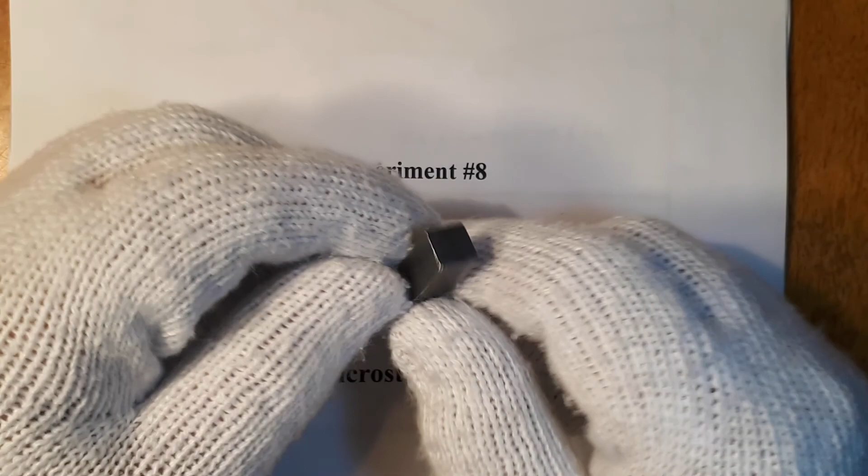Let's take a moment and talk a little bit more about Experiment 8, in particular, microstructures. In Experiment 8, we did Charpy samples, much like this one right here. The next step would have been to cut these, make a metallurgical mount, and look at the various microstructures after the different heat treatments that we did, like this.

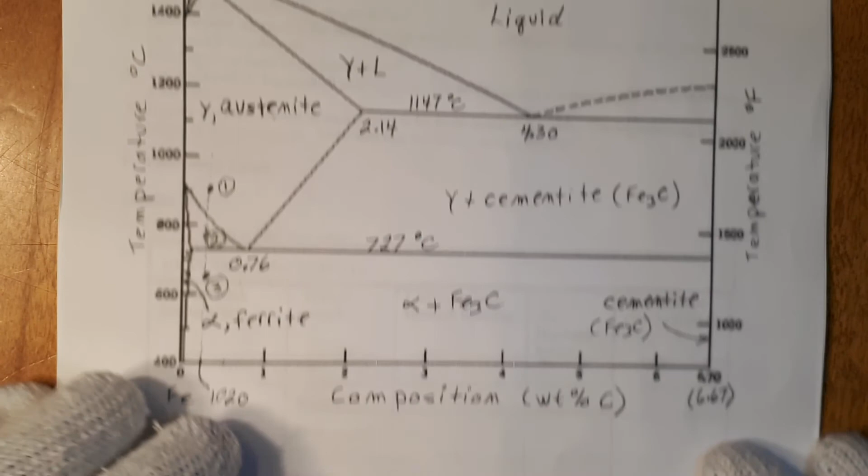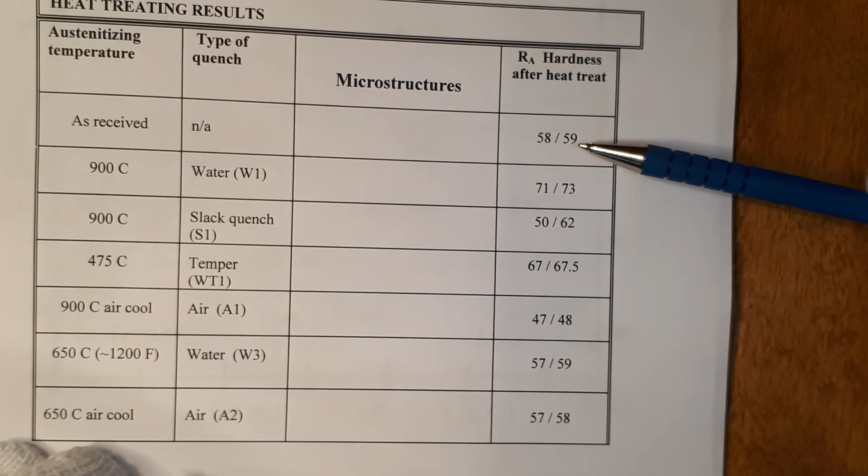This iron cementite diagram can be used as a guide for heat treating. I'm going to use this as our guide, and here is our experiment. I'll try and put these side by side. I rewrote the actual chart. On the right-hand side here, we have the various Rockwell A hardnesses based on the various heat treatments that we did.

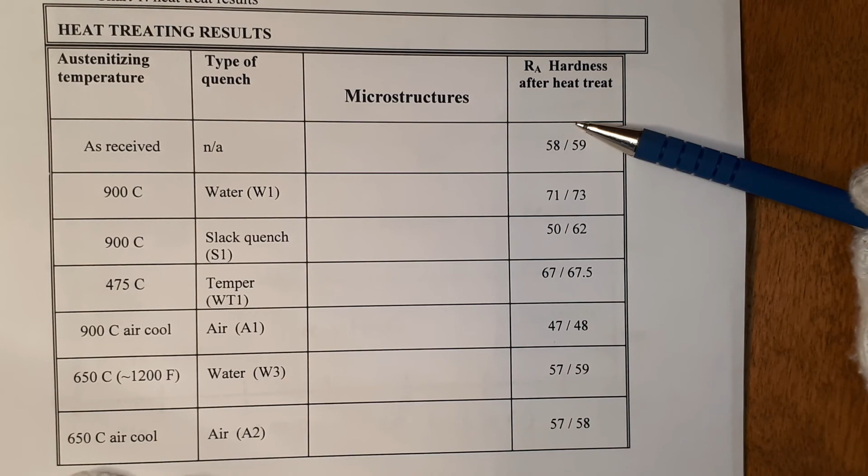What we see here are the results of both classes, the Tuesday and the Thursday class, going on down the list in Rockwell A. Now I'd like to talk about the microstructures, and I'll try and do this simultaneously with the iron cementite diagram.

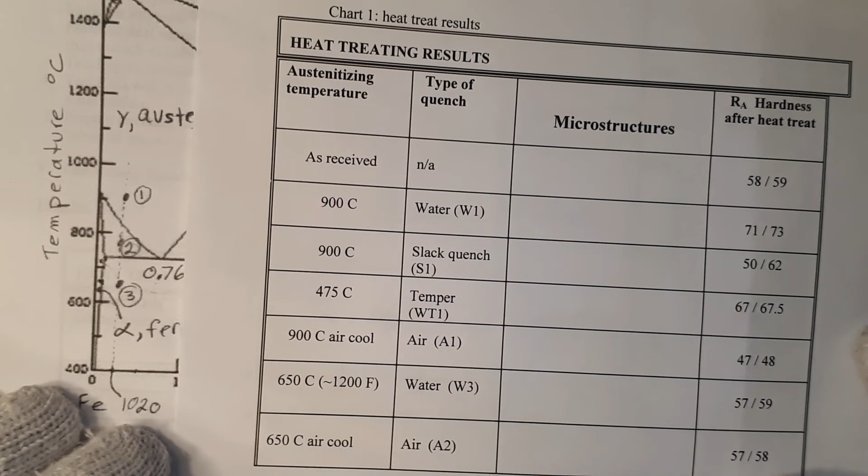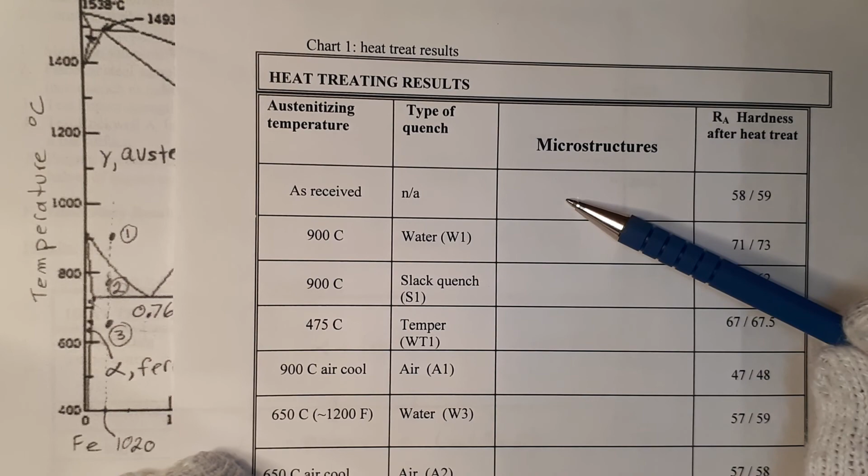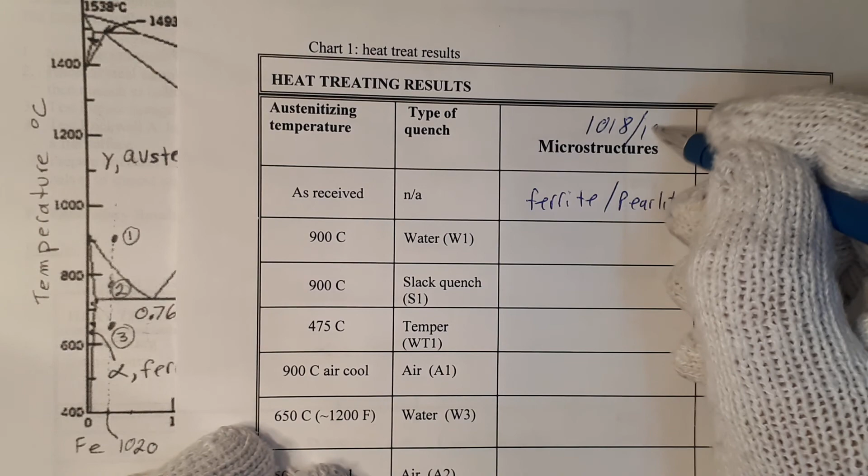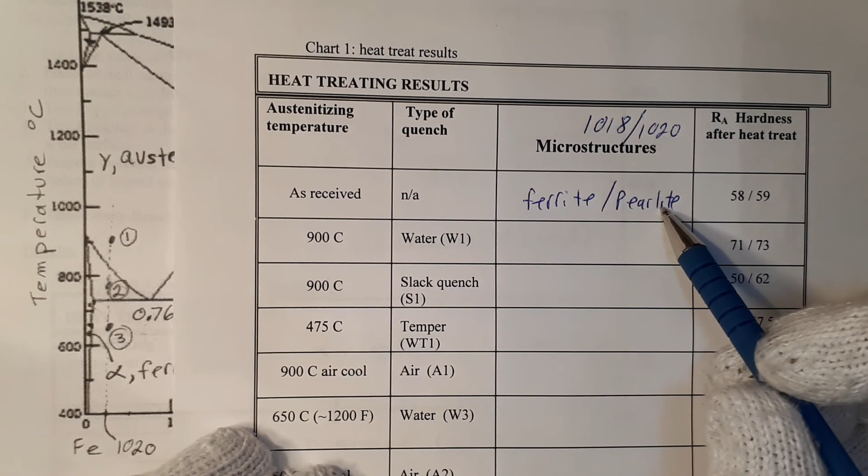In the as-received condition, this was cold-rolled steel, and the microstructure in cold-rolled steel, nothing special happened, would be slightly elongated ferrite and pearlite. Recall this was 1018 steel, or it could have been 1020 steel. The two steels were mixed in the drawer. I don't know which one it was exactly, but it's one of these two. Ferrite and pearlite, it wouldn't change much as far as the microstructures go.

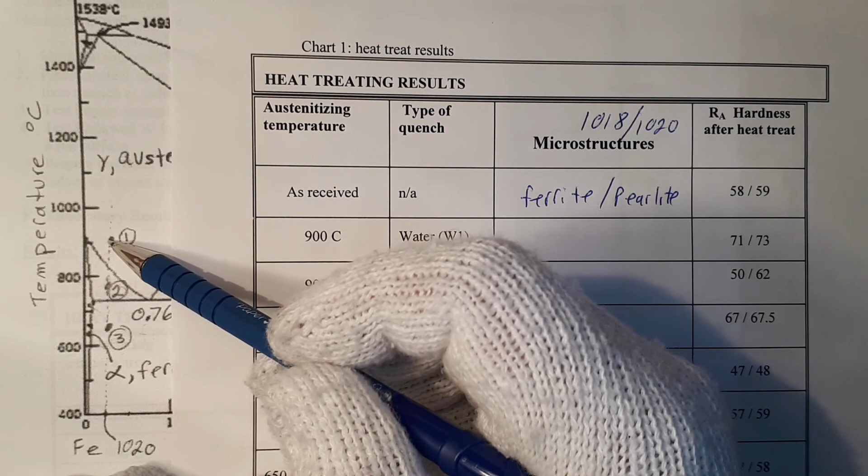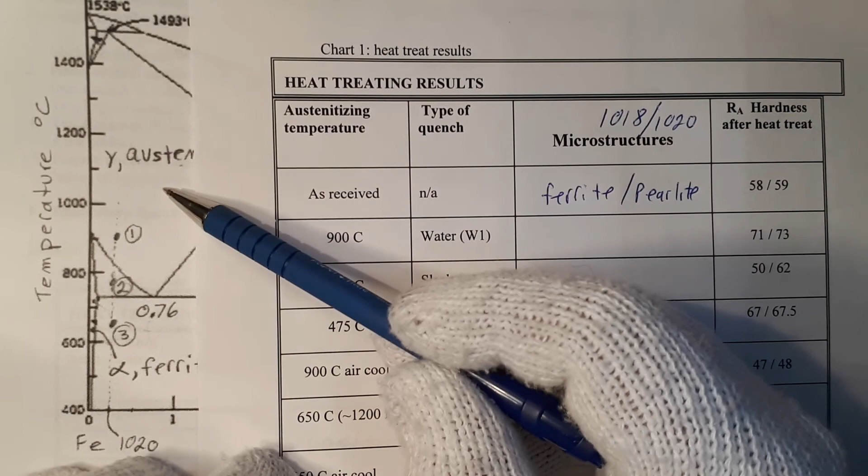The first sample that we did, we heated it up to 900 degrees Celsius. Here it is, so let's say 1020, it's easier to see on the graph. We heated it to 900 degrees Celsius. The idea here is to form 100% austenite. Once the austenite is fully formed throughout the sample, the rule of thumb is 1 hour of soaking time for every 1 inch of thickness.

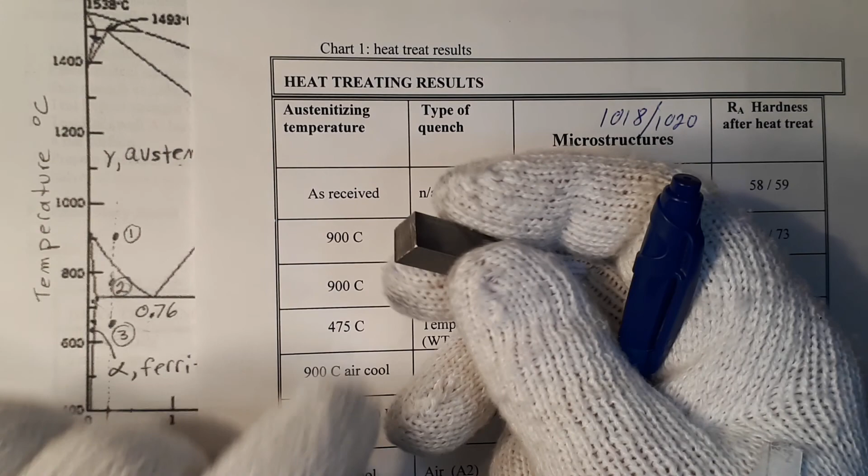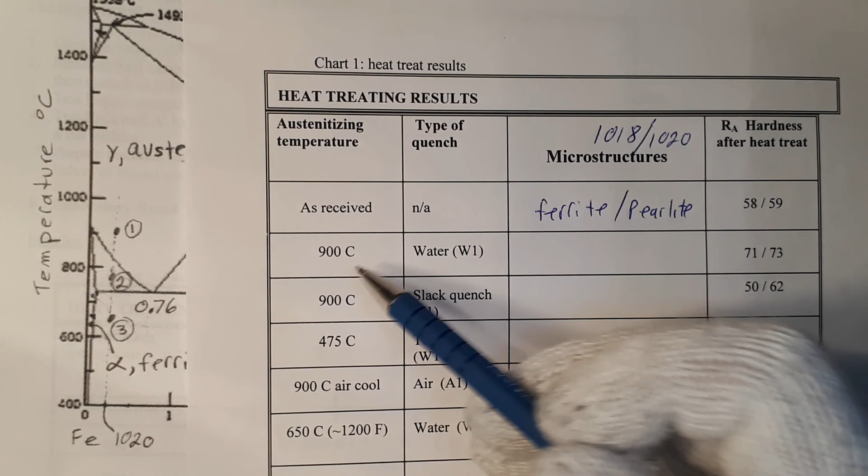So this soaked for 30 minutes, to ensure that the core all the way through is at austenite. And then we water quenched it. So heat to 900 degrees Celsius and then water quench. In doing so, the microstructure that would have formed after quenching, if you were to take that sample after quench...

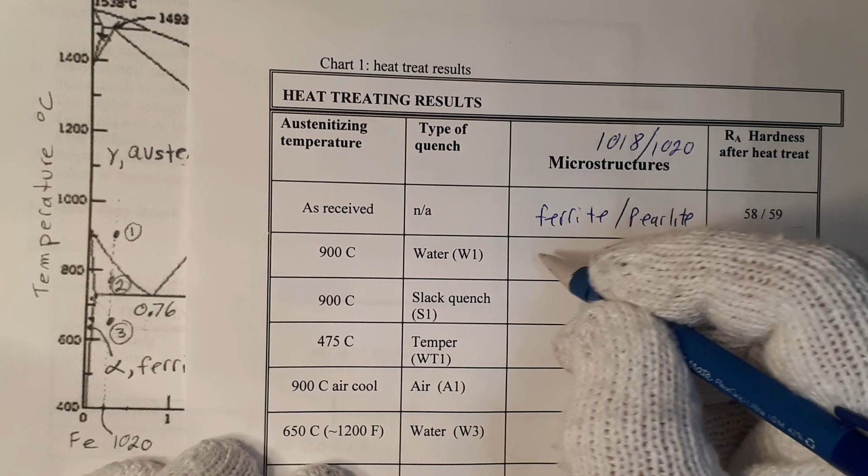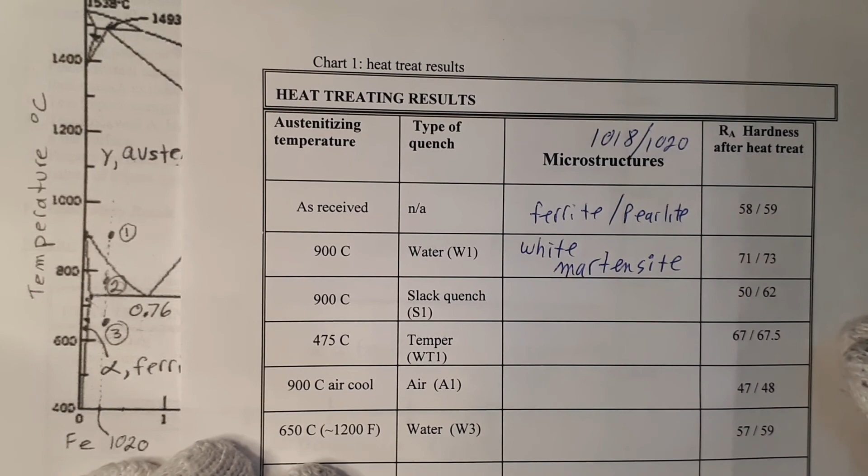...would be martensite. This has a special name: after quench, it's called white martensite. It's a very brittle structure, also very hard, and you can see that here in the hardness. It should be the hardest in all of this column, and as you can see, it is the hardest.

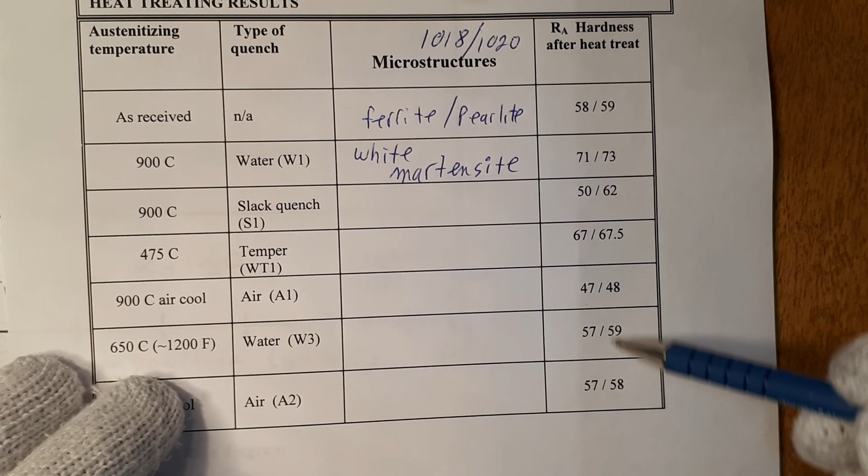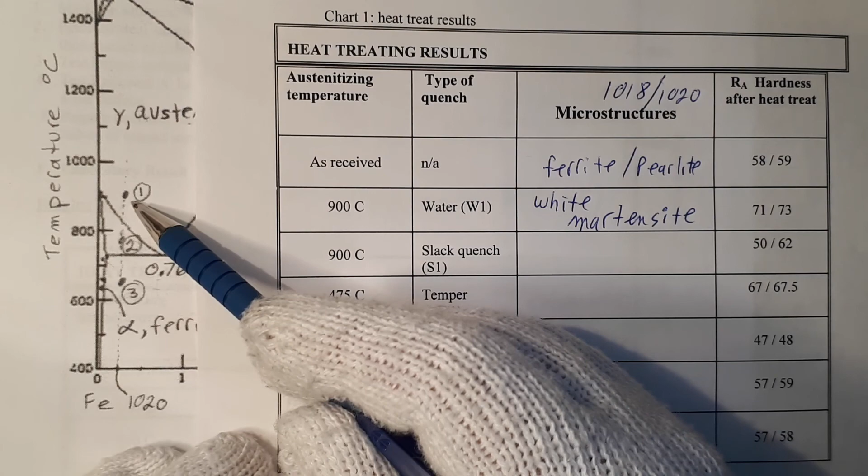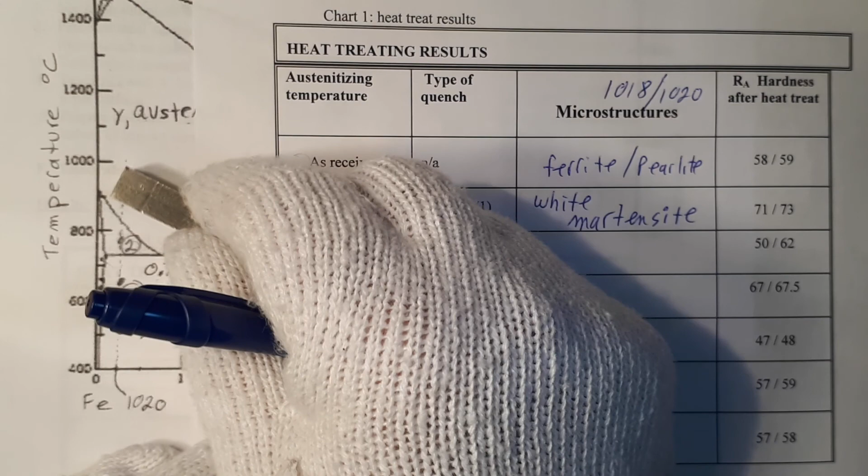The second example I did was heat treating the sample to 900 degrees Celsius, letting it soak, forming 100% austenite, and I tried to do a demonstration of what's called a slack quench. Then I took the sample out of the furnace and held it in the air, hoping to drop the temperature to this region in here, such that the microstructure in this region would be a combination of ferrite and austenite.

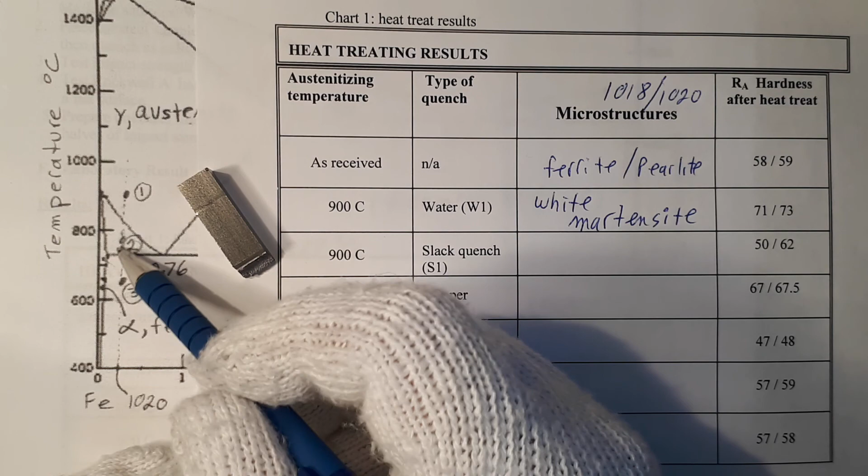Austenite is unstable at room temperature. So once this cooled down into this region, of course that was a guess on my part, there was no real timing done, but I was letting it cool down based on color. And then we quenched it. The ferrite will remain ferrite because it won't transform, but the austenite is unstable at room temperature, and the austenite will do exactly what this austenite did.

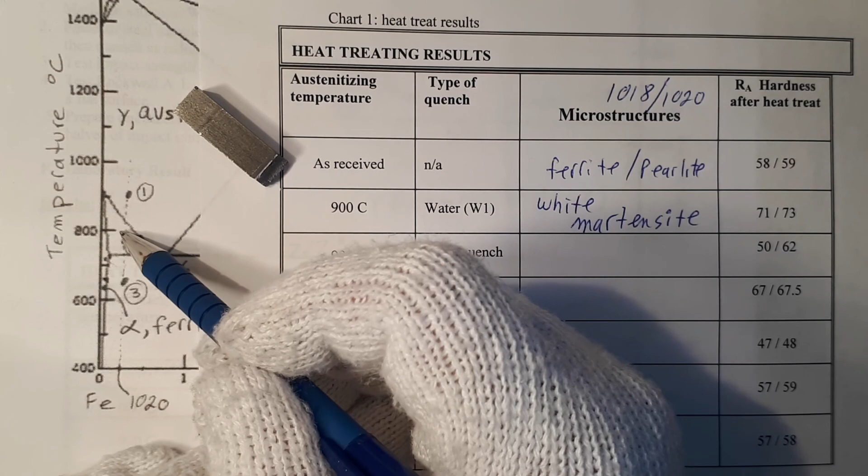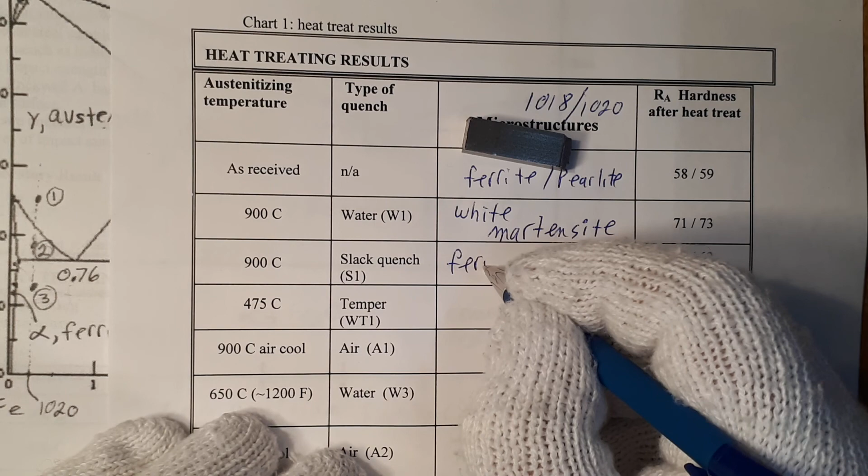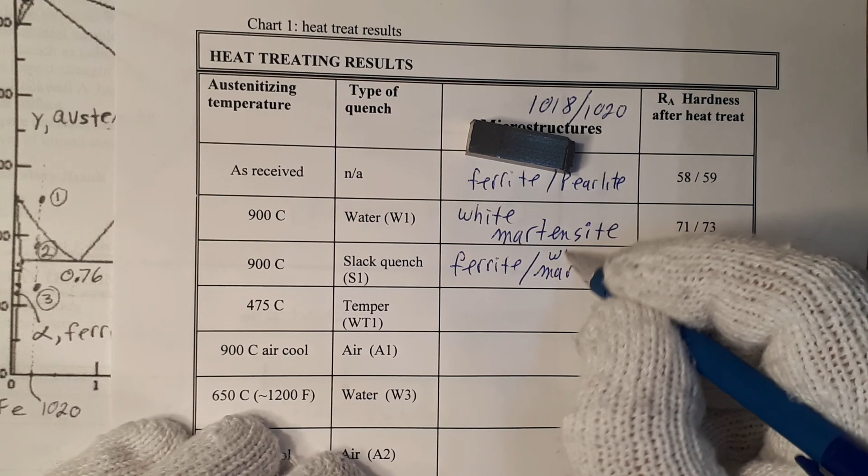It will form martensite. So the microstructure, when we look at this in the microscope, will be a combination of ferrite and martensite. Again, this particular martensite has that special name of white martensite, to indicate there was no tempering done. It was as-quenched martensite.

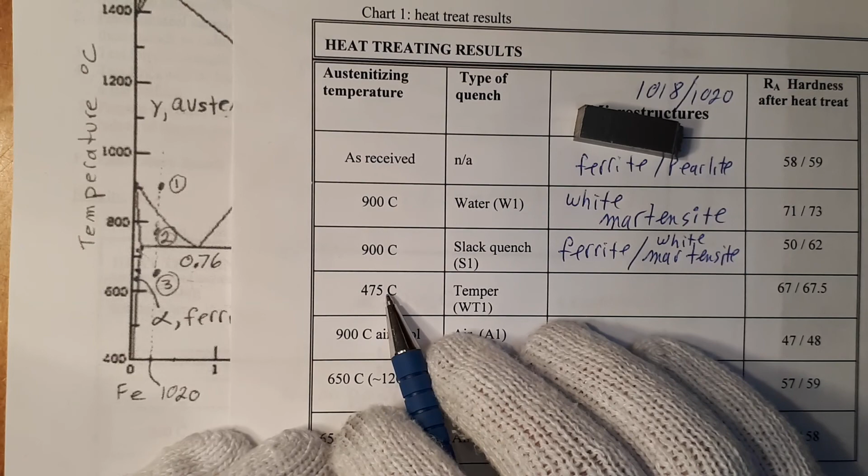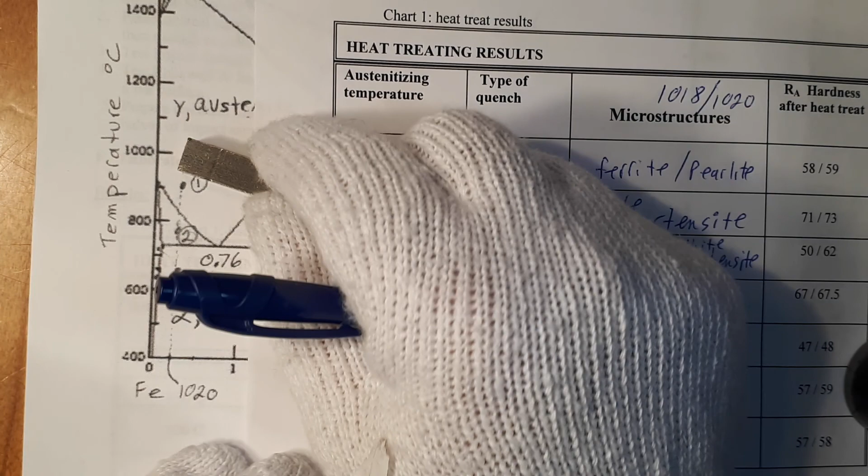The next one we did was a temper. Actually, this one was 900 degrees Celsius. We brought the sample to 900 degrees Celsius, let it soak, and then we quenched it, forming white martensite, and then we tempered it back. Tempered back at 475 degrees Celsius in here, and then let it cool back down. This is a standard harden and temper operation.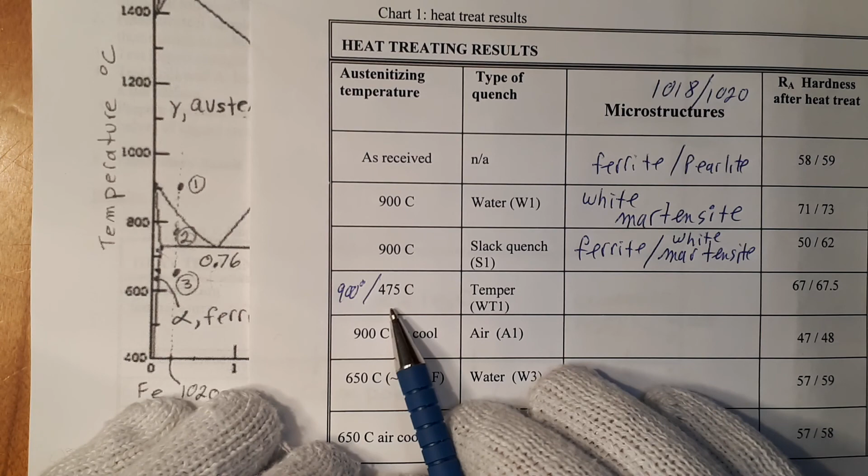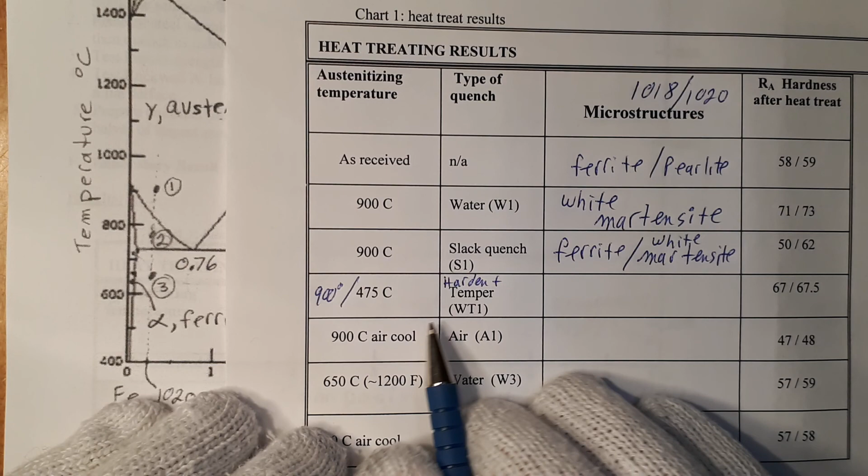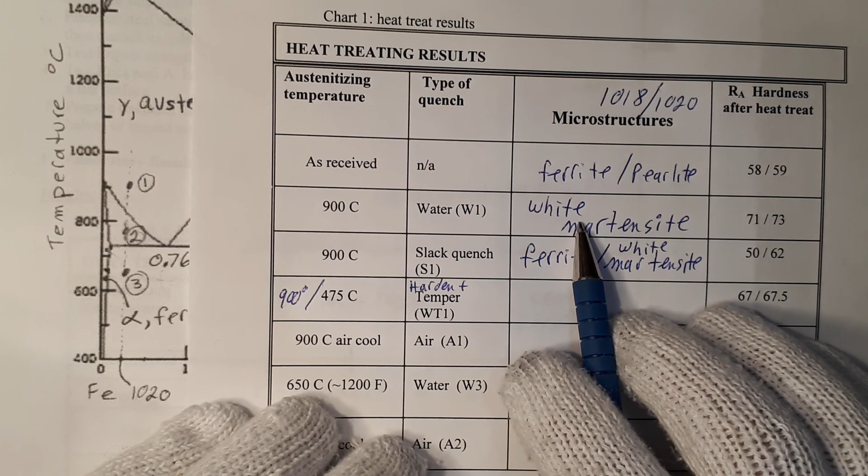Harden and temper, I'll write that here. Harden and temper. Many steels, or most steels, will go through this operation, and it gives us the toughest, strongest materials for engineering purposes. What happens here is we form white martensite in the quench operation, and then this gets tempered back during the tempering at 475, and it has a special name called tempered martensite.

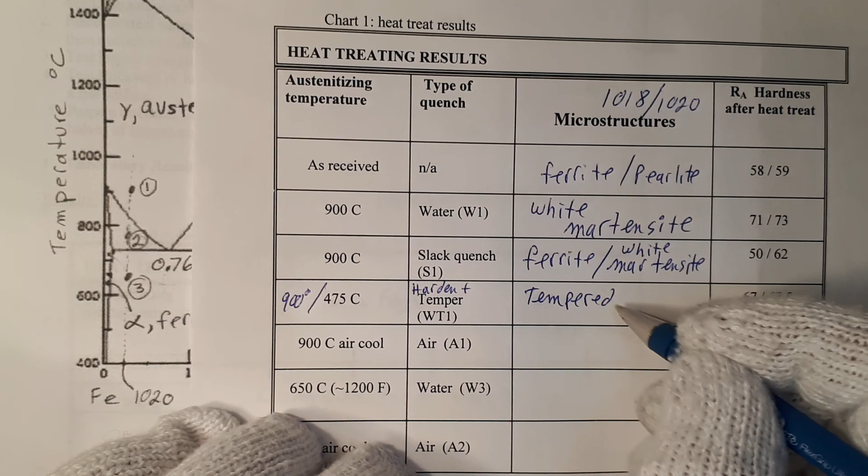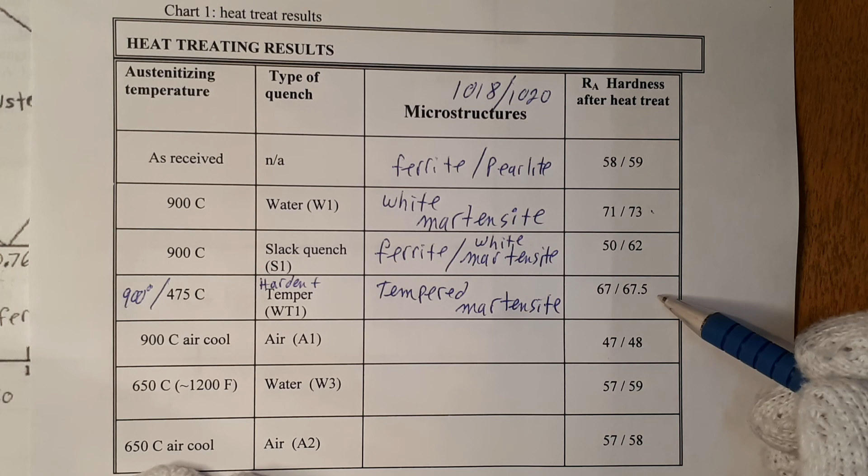It should have the second highest hardness on our column, the hardest one being the actual martensite itself. And then when we temper it back, we'll give back some toughness and lose some hardness in return. So it should also be the second hardest. And as you can see here in the hardness column, it is just that.

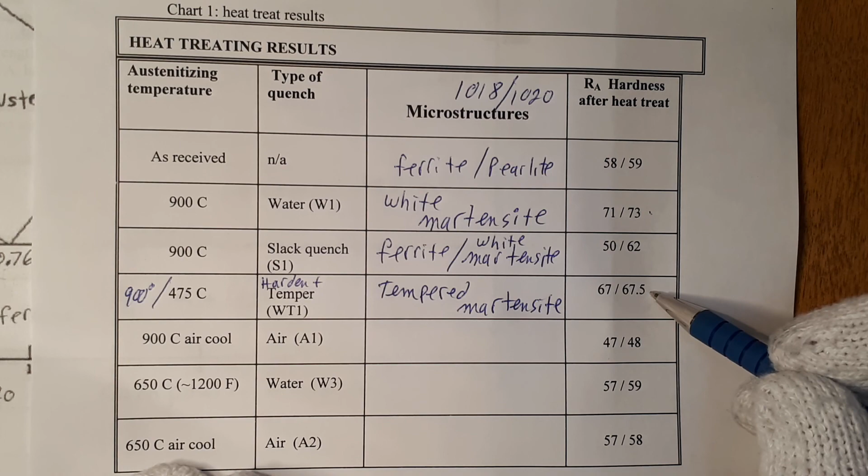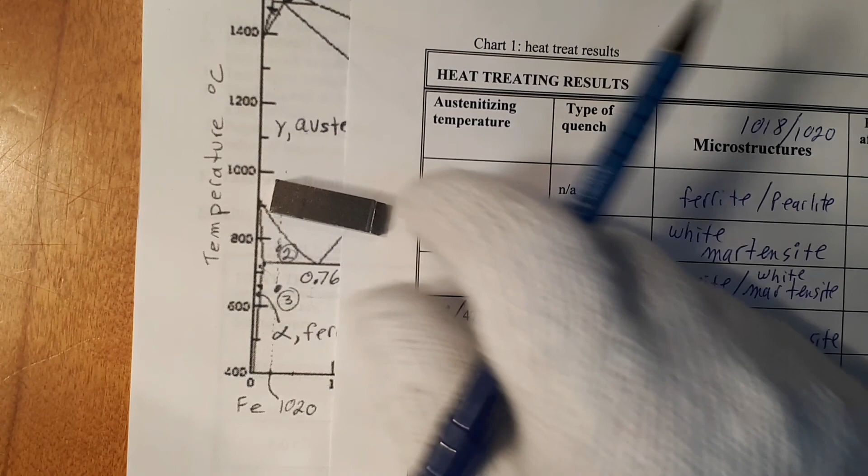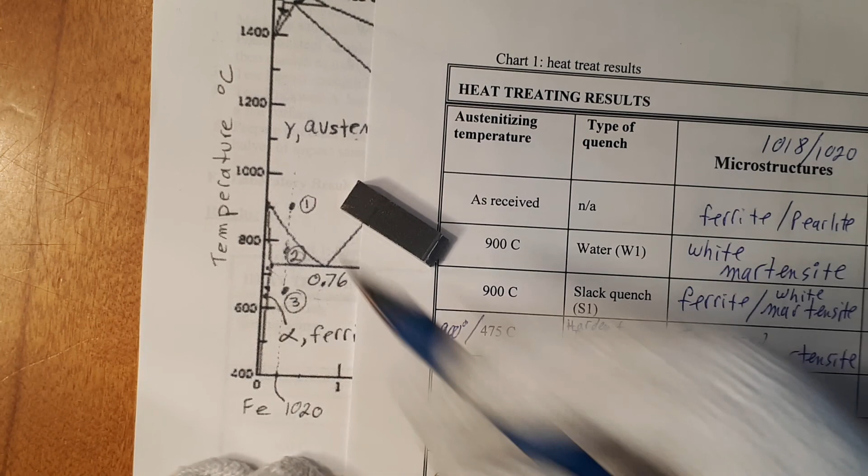The next one we did, well, this is basically annealing. Take our sample, heat it up to 900, form 100% austenite, and then let it air cool all the way back down. So it will follow through these transformation lines. No quenching involved, so this graph right here would be appropriate to use. It would follow down, go through all these critical transformation lines, and come back to room temperature.

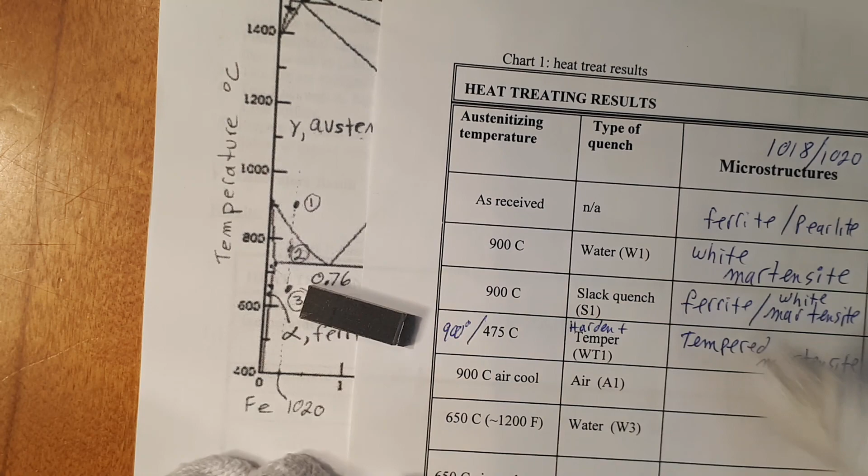The final structure will be exactly what the structure is in this field right here. And that basically is the annealing that we did. And the final microstructure would be ferrite and pearlite.

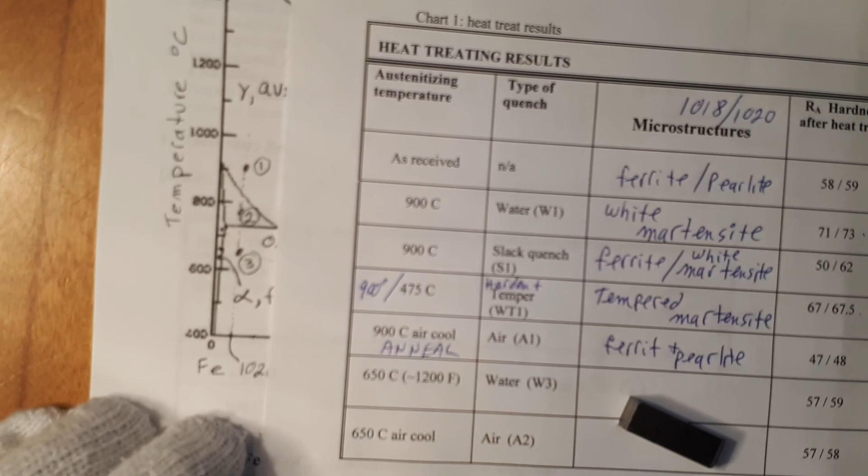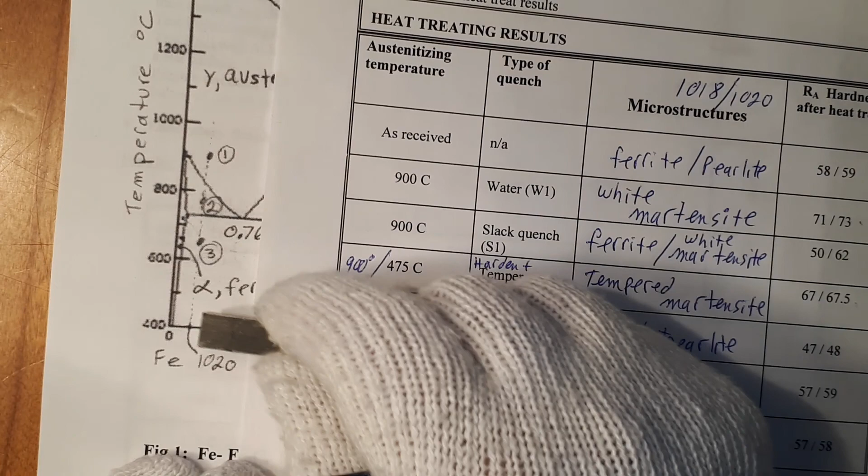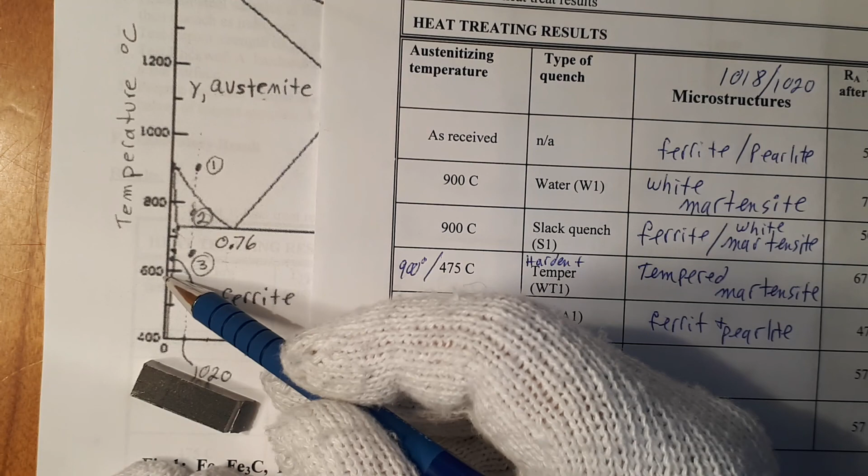The next one, we took the piece, it was already at ferrite and pearlite in the cold-rolled condition, and heated it up to below the lower critical temperature, below A1. We heated it to 650 Celsius, say 600 Celsius about here. And then did an air cool and a water quench from this region.

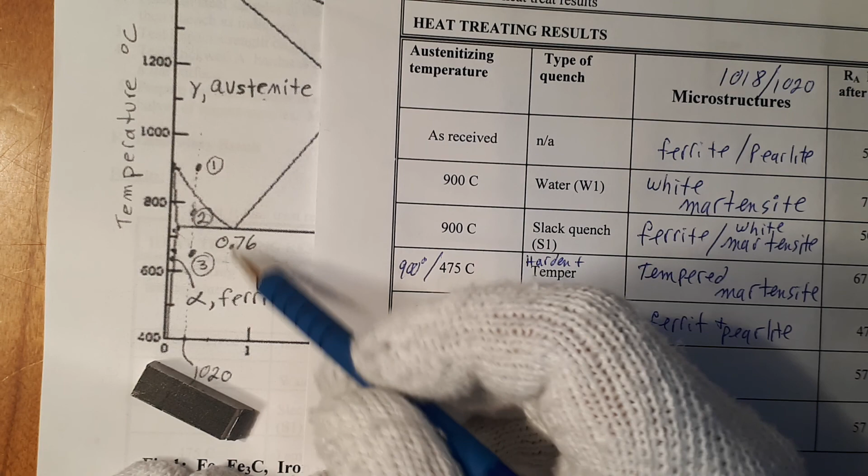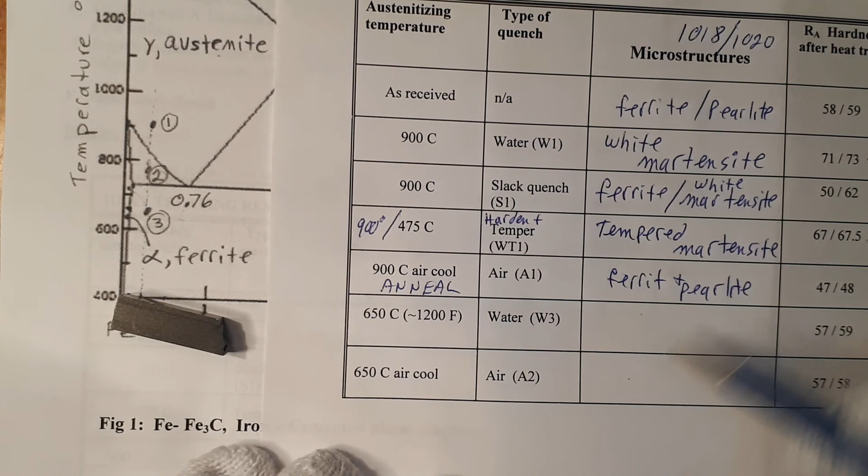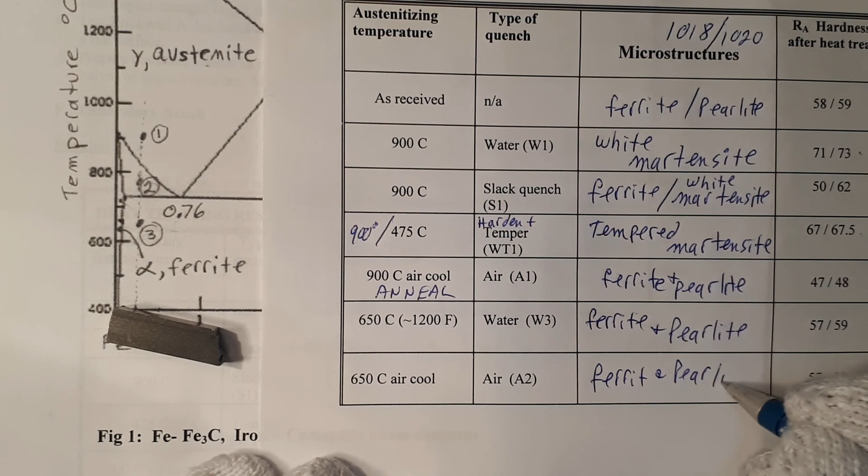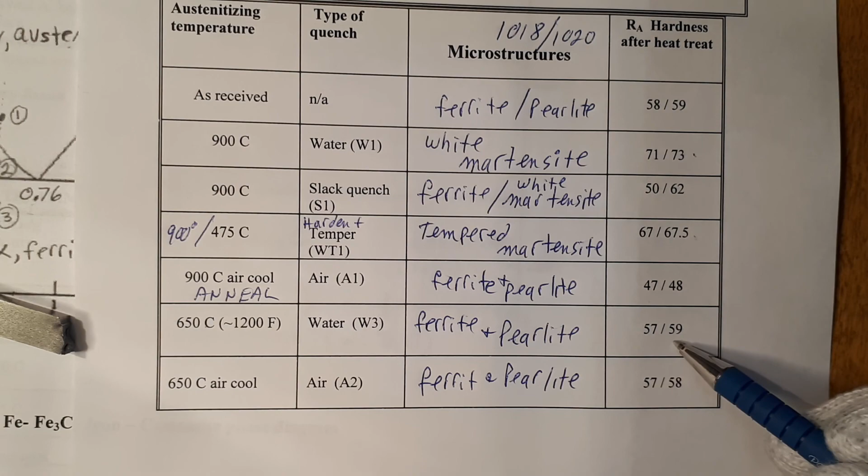Since we didn't cross any of the critical temperature lines, the original microstructure remains the same. It started with ferrite and pearlite, and we're going to finish with ferrite and pearlite. And the same with this one. And the hardnesses, as you can see, are the same for the two of them. That is because we didn't go past any of these critical temperature lines to form austenite and physically change the property of the steel.

Only did some stress relieving in effect.